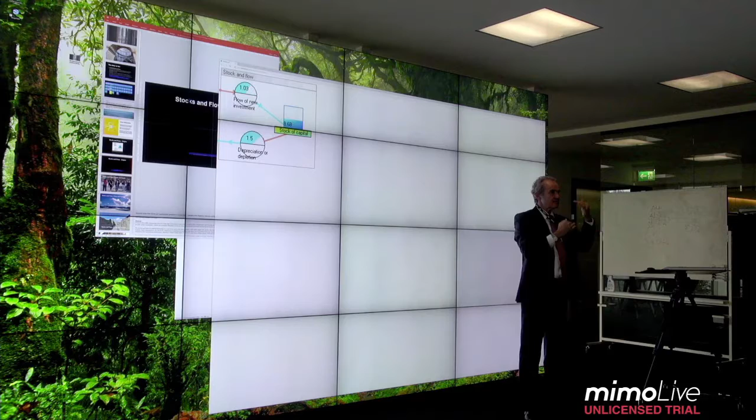If you now imagine this principle, see it just as a principle, not one-to-one in a city. This principle can be applied to many things. For example, here you could replace that stock and flow of money with another entity. What could be a typical entity for that in a city?

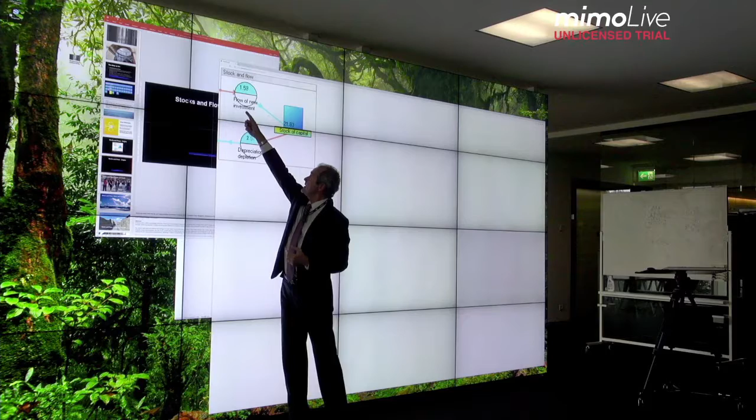Population. Sure, people. People are indeed the most important stock and flow of a city. I hate to use that word for people because it's really a terrible description of them. But if you abstract their stock and flow, how they behave in a city, it comes very close to that. People come in, moving from the outside into the city, and they go out of the city, or they die. That relates to the previous slide about the 2.5 to 2.6 billion people who will move into cities in the next 20 to 25 years.

Okay, now we go back to that one.

Right, so people, that's the most important stock and flow. And health is another one. As you know yourself, you have a certain stock, if you want, of health, but you can ruin your health really easily, and then you need a lot of time to build it up again. So you can also see your health as a certain stock and flow.

Then there are more, water, for example, and capital. Capital is the one that we saw at the beginning and where the whole principle comes from, but water is a very good stock and flow as well. Just think, at home, you open the tap, it's a flow, it's very obvious, but then you put some into a glass, it's a stock, you drink it, it's a flow again, and you can just see how it keeps working on and on and on.

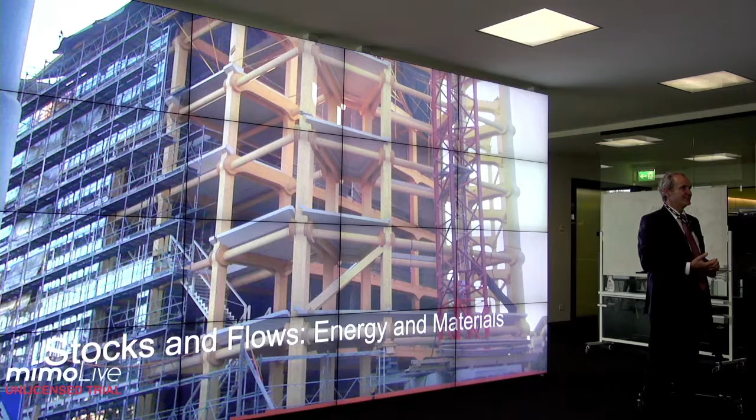Another example for that, energy and material. This building is now completed, of course. It's the Tamedia building here, but you see it was really done with wood and concrete. Our Japanese guest, you know the architect? Probably. Do you know the architect of the? Yeah.

Everybody knows that. And you could see it's a material that has grown somewhere else, cut down the trees, laminated, brought here to this place, become a stock for a while. But you could easily use this material later, just cut it into pieces and turn it into a flow again and produce energy with it.

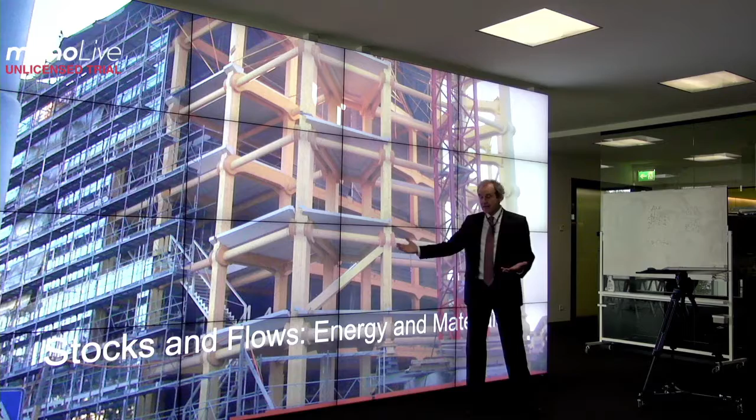As a matter of fact, in the village where I live at the moment, in Einsiedeln, recently, just last week, a new little firm was founded that has the purpose just to take the stock of old building materials, old wood that you cannot do anything with, take this stock, shred it, and make energy out of it. So you turn a stock into a flow, and you connect energy and material through that.

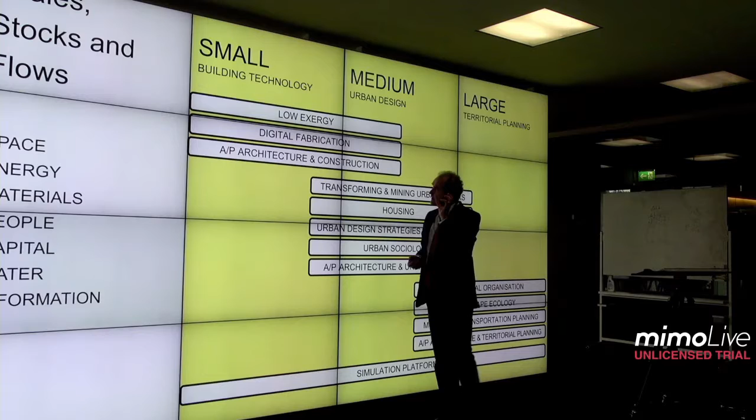Then the stocks and flows, you know them by now. It would be space, energy, materials, people, capital, water, information, health. You could just keep on going, but these are the ones that we try to study.

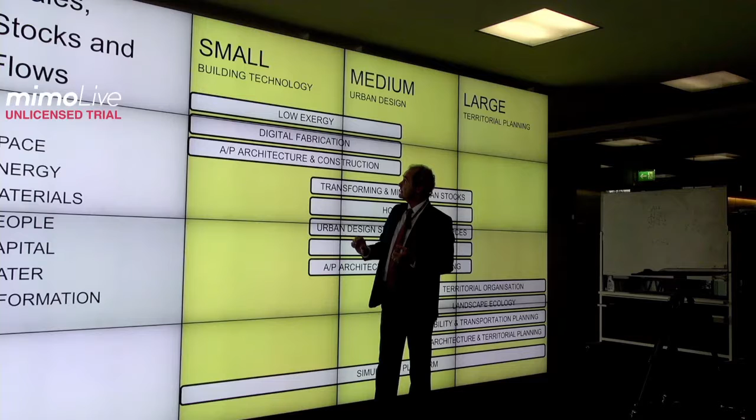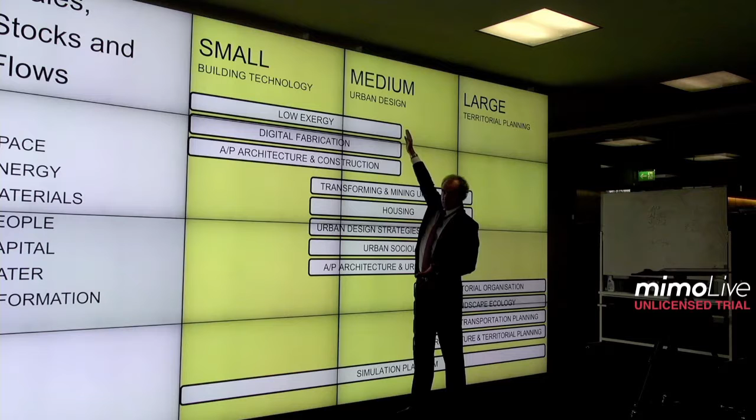And then we put them into projects, and these projects then explored, for example, the stocks and flows of energy on the small scale of a building, and you can see it reaches from the room all the way maybe to half a quarter of a city here. Or digital fabrication, or architecture and construction, all for stocks and flows.

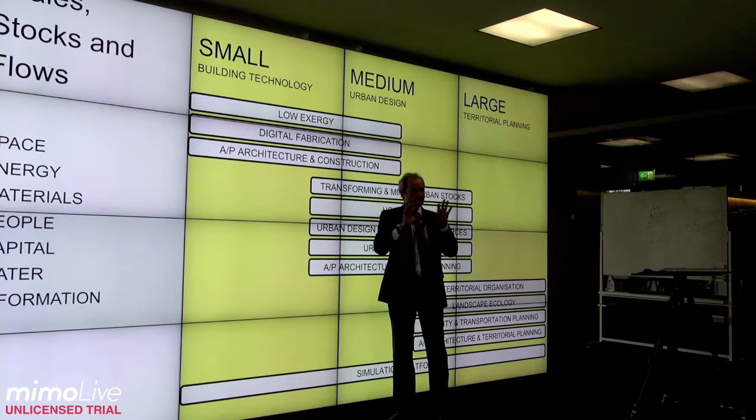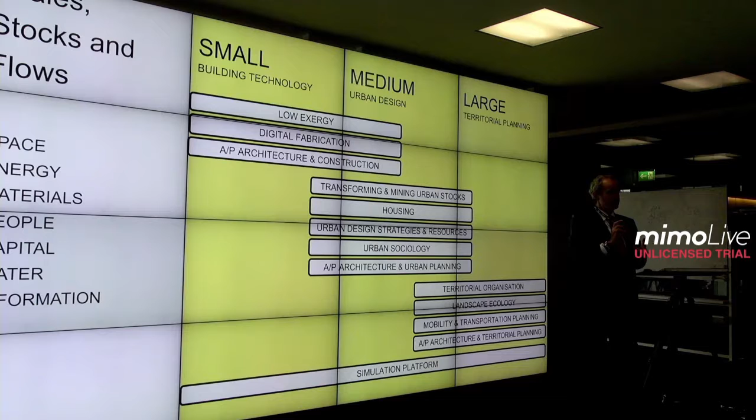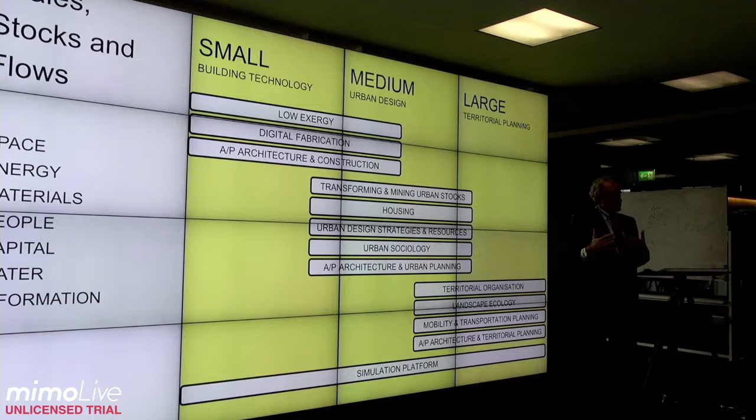Coming to the stocks and flows, but wouldn't a very central one also be life quality? Definitely, it's one of the main ones in the city. It is the main one, but it's hard to study it by itself. You can see the result of it. You can measure - people think you can measure the quality. They cannot agree on the criteria, but I think it is possible to measure quality.

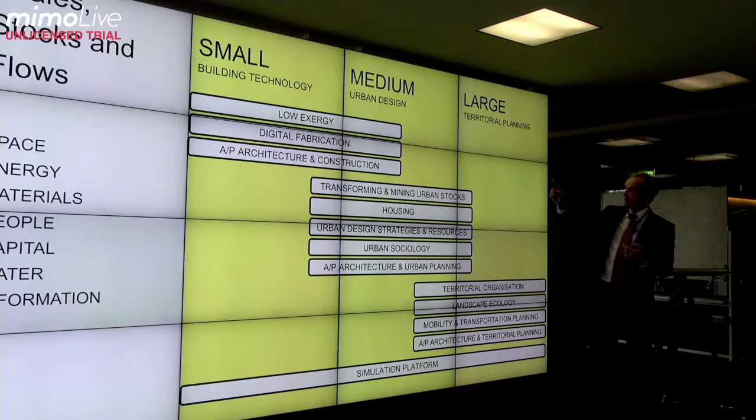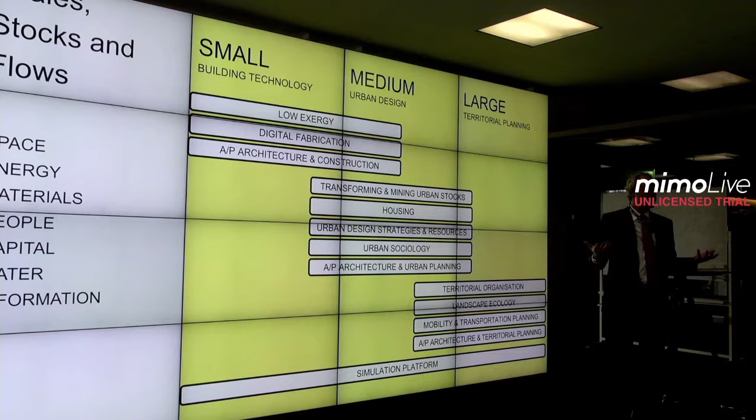But how to achieve quality? Either you look at what quality is and then analyze what stocks and flows the city has and try to invert it and make a better city or a good city this way, or you have to invent new criteria, as in architecture it's often done. But quality is definitely another stock and flow.

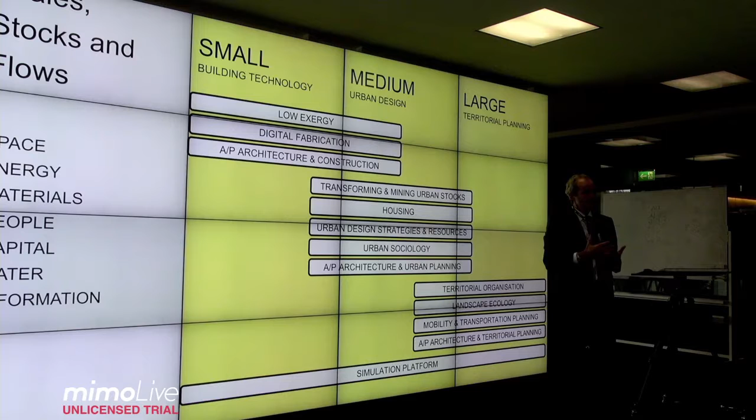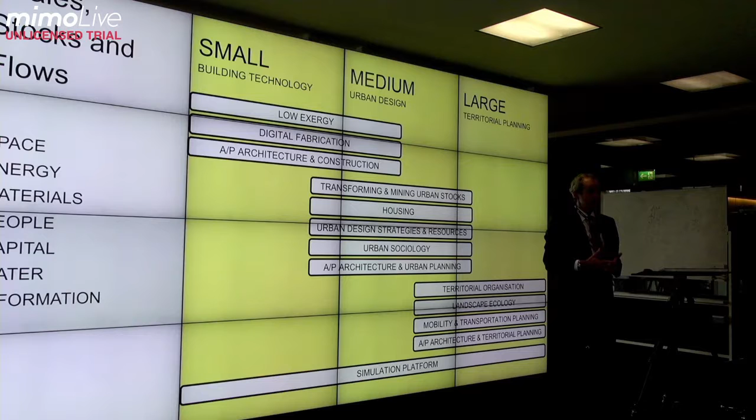It's actually a nice one because it changes over time, and it changes in intensity. Cities become very attractive or less attractive, and it's linked to all of them. Every one of them is linked to all of them.

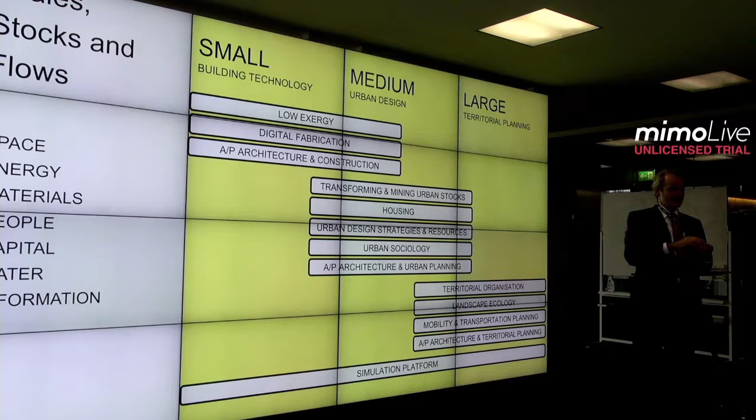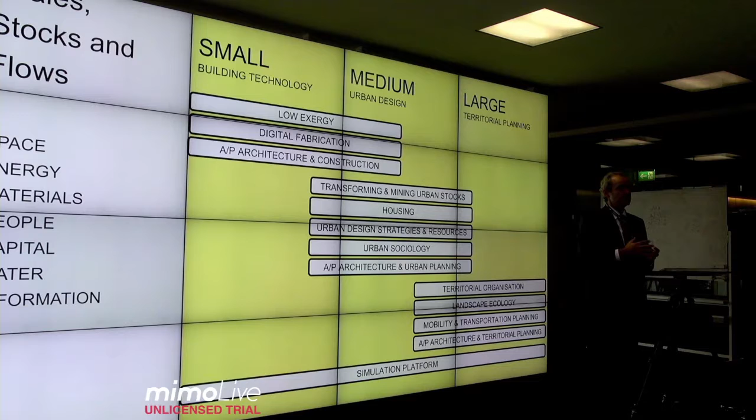And that's why towards the end of the semester we come to this view of a city as a complex system, the complexity science, where you can express somehow this total connection between elements without having simplistic causal relations between them. Quality and health is another one, that's also related to all of them, but it's hard to say - design a healthy city, it will be different in every place, in every time.

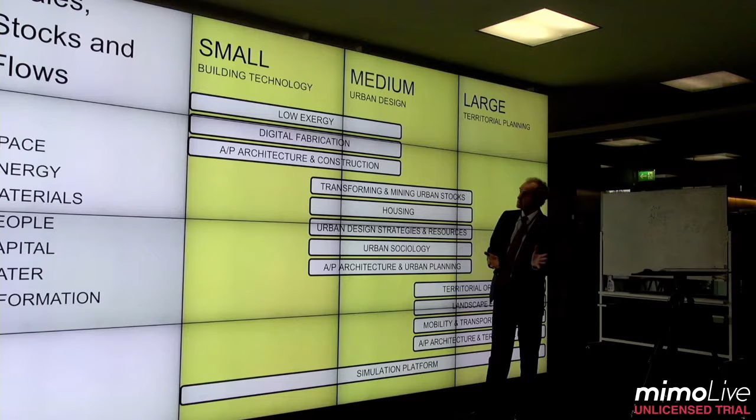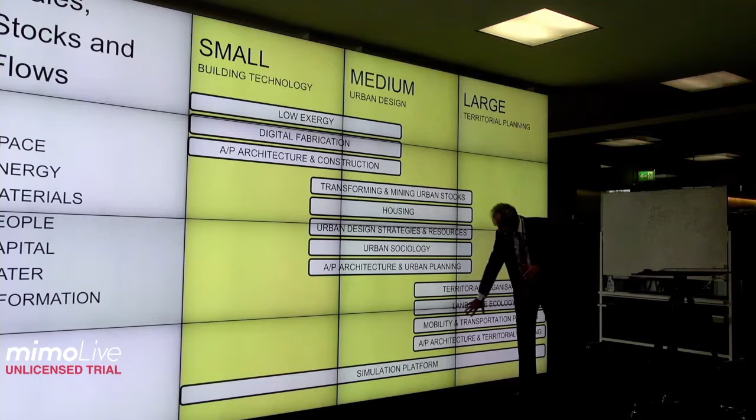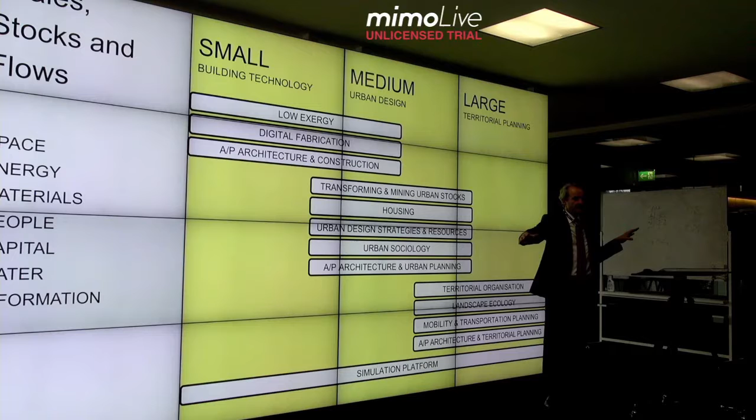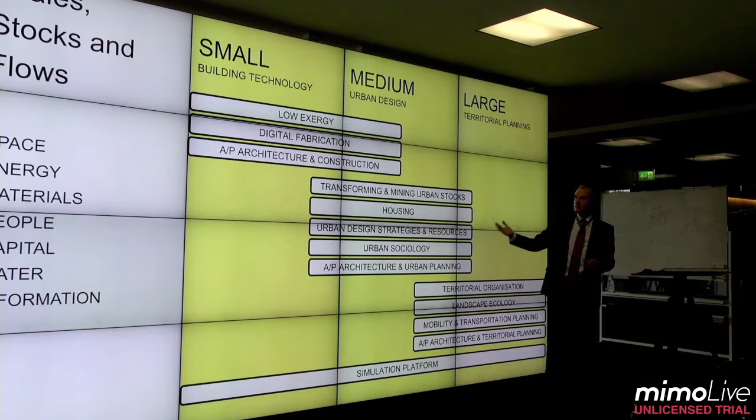But what we could find out was that some scales or some stocks and flows are applicable to certain scales, like those ones to the smaller scale, those ones to the medium scale, and then some of them to the large scale. Our contribution to this whole exercise was that we built a simulation platform covering all the data coming from these different research projects, taking in all the data, then visualizing the data and making it available to each one of the other projects.

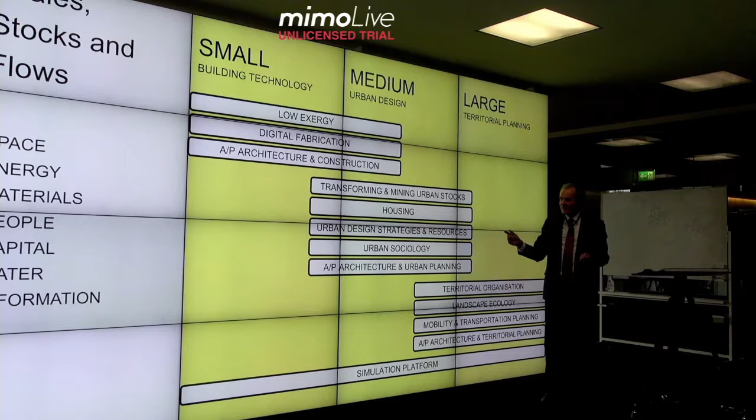Let's go quickly through a few applications of these stocks and flows to get an idea - they are all very important for the smart city or the responsive city. We know that now. At this point when we did that, smart city, responsive city wasn't even existing. But now that we have done this research work, we know what we need to make smart cities and responsive cities.

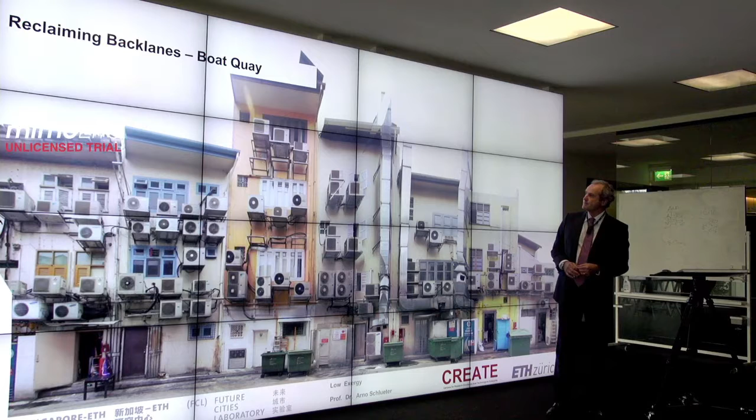These are all air conditioning units on the outside, from the low exergy project in Singapore. The low exergy project deals with stock and flow of energy, mainly on the building scale and city quarter scale. Electricity comes in and turns into hot air coming out, leading to problems that make these places unlivable. If you have to live right next to those, or in a back alley next to them, the quality goes below zero.

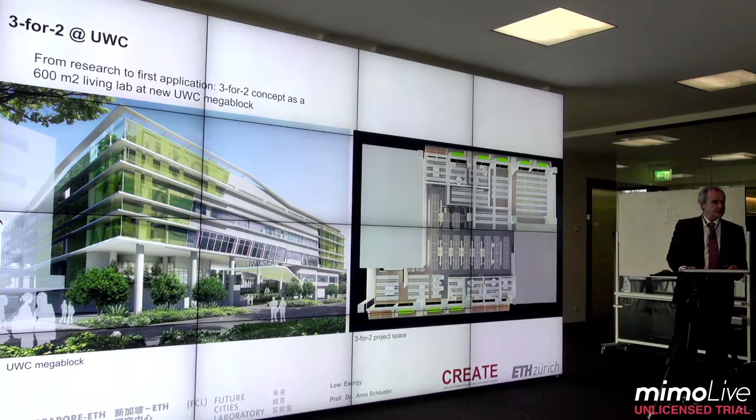They took this principle and turned it around because they saw this is reality now, and thought of the future—think of Mark's lecture on the now city and the future city. They took this step physically. They saw the now city: this is how it is now. It's unbearable, hot, it stinks, it's loud. What can you do with that? They turned it around and said we have to change the way we air condition buildings.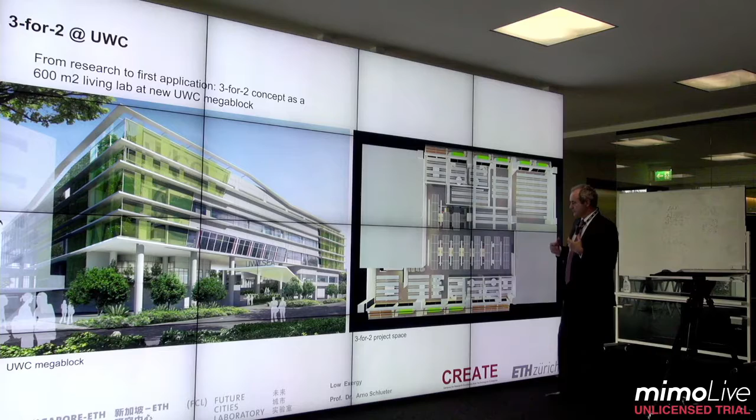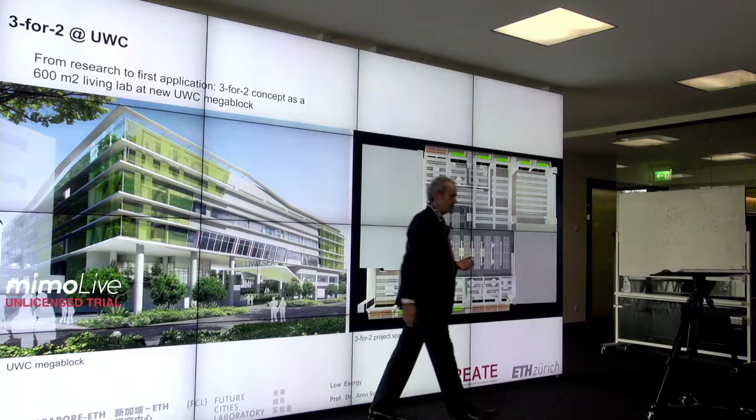They designed and built an alternative way of air conditioning for this actual building, in two floors at the United World College of Southeast Asia in Singapore. So that is stocks and flows of energy.

These two young gentlemen you know very well—if you've been to the new robotics building here on campus, you've seen it, you were at the opening. That was 5-6 years ago. That's how they started this application, how to use robots in a space to construct buildings. This was their start at this time.

You see the robots are much smaller, but the ideas were already there. So this is the stock and flow of material—how you can handle it and combine it with information embedded in the robotic infrastructure.

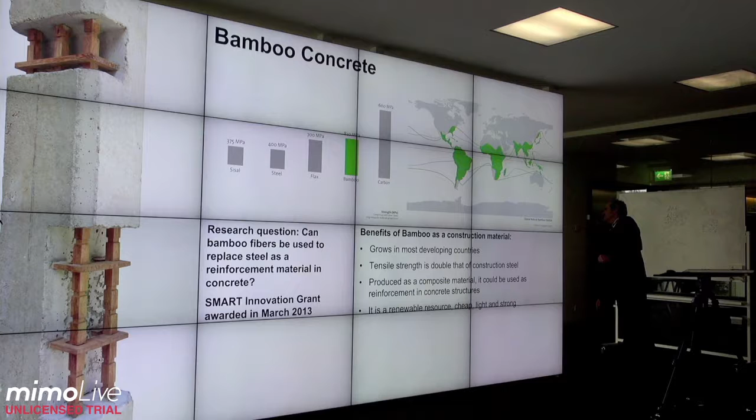Then the stock and flow of material also—another wonderful example. Estefania, could you steal a material sample from there? Anyone? Look there on the table. Maybe there's one—no, on the back, the physical material. That's too heavy. No, this piece. Yeah, this. Oh, it's screwed to it. Okay, you have to go there later.

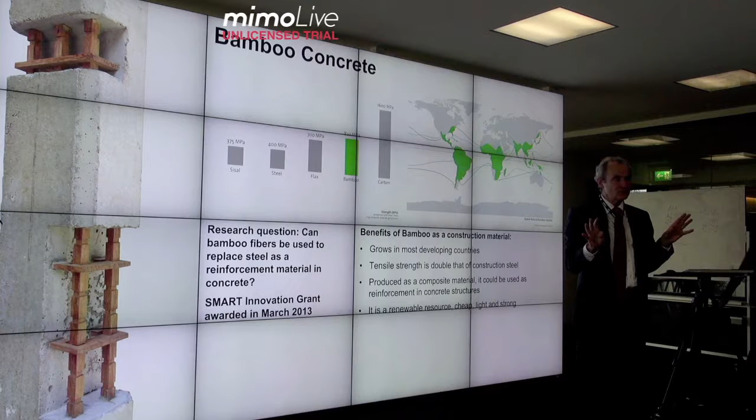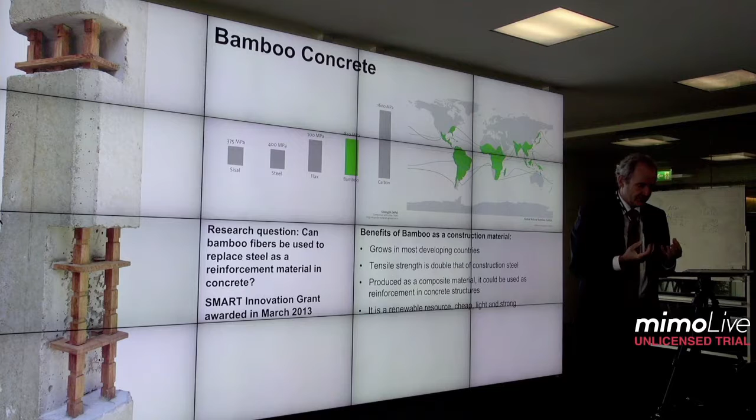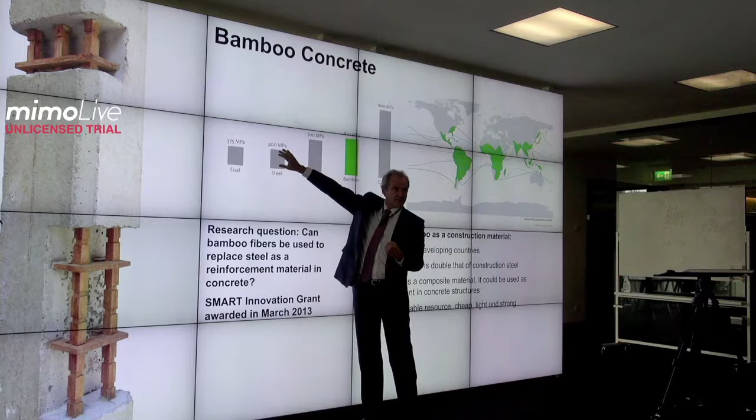But the point, you know it, right? This is bamboo material—not pure bamboo, it's laminated bamboo. Bamboo is split, cooked so the sugar goes out, then combined under high pressure with a conglomerate, a plastic basically. That makes a material that looks like this, which is very hard, very dense, and has an incredible tensile strength, higher than steel. This would be the tensile strength of steel, and this composite material with bamboo is higher than steel.

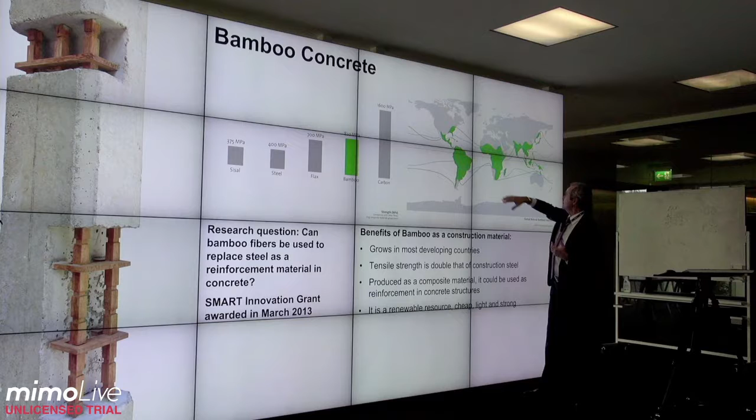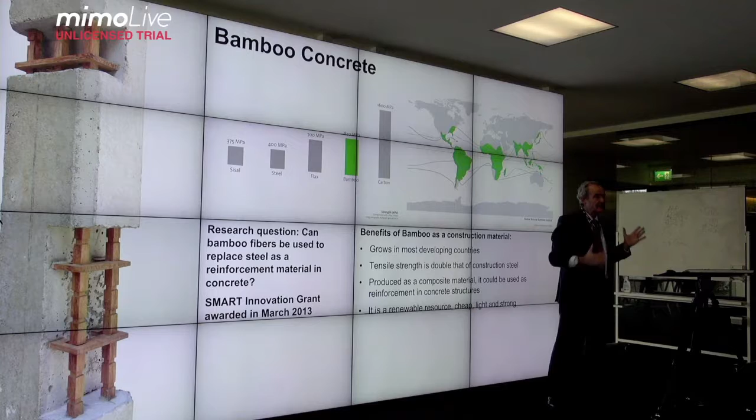It's quite amazing. And this is again the stock and flow of materials, because here in green you see all the places where bamboo is growing naturally, and you also see all the places where normally not much steel is produced, like all of Africa—steel has to be imported there, but bamboo is there. So the stock and flow of building material could be changed completely by using a different material, replacing steel with this bamboo composite, for example.

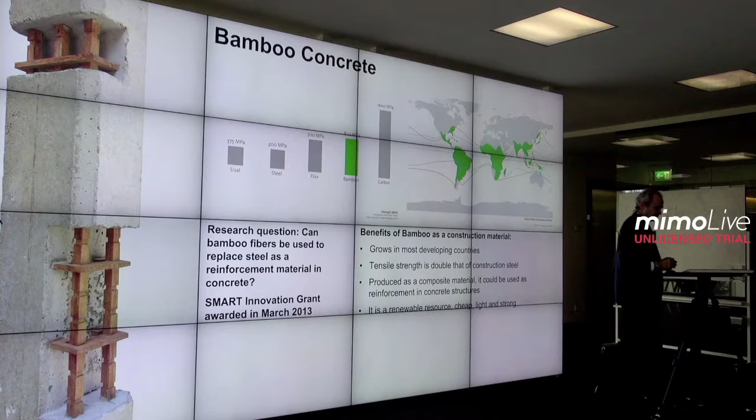And then this one is quite stunning also, the transforming and mining of urban stocks. Urban stocks—all of these are urban stocks, they're all materials. This building also has stocks: it has concrete, less hard materials, glass, steel, natural stone. And you can mine this stock. In the old days, one would have just thrown it away, trashed it. But now, every one of these materials is valuable.

Our colleague Dirk Hebel is working on a big book on identifying each material in a building, its value, and making it part of the urban stock. Because if you know that stock, it's like money—you can sell it, buy it, and reuse it.

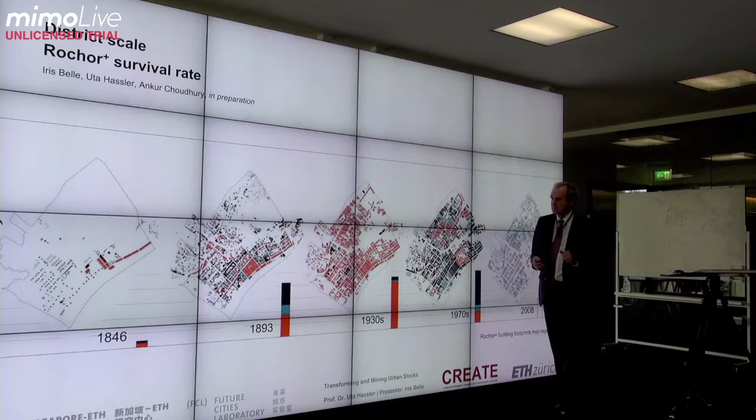Uta Hassler, who retired just a couple of years ago, was working on this very carefully and made, with her groups, some incredible visualizations. This is a part of Singapore, of the city of Singapore. It's always the same part.

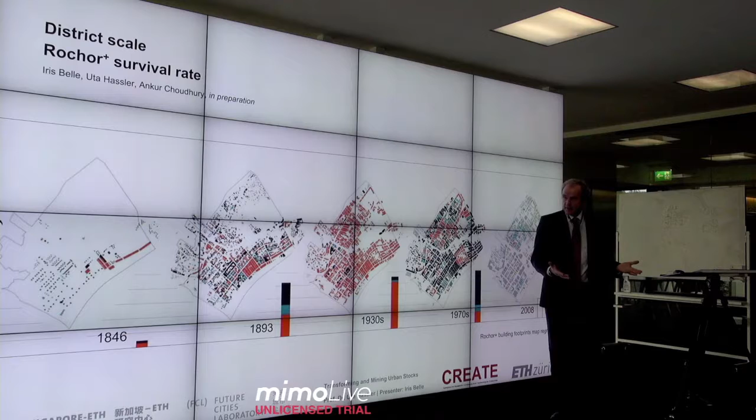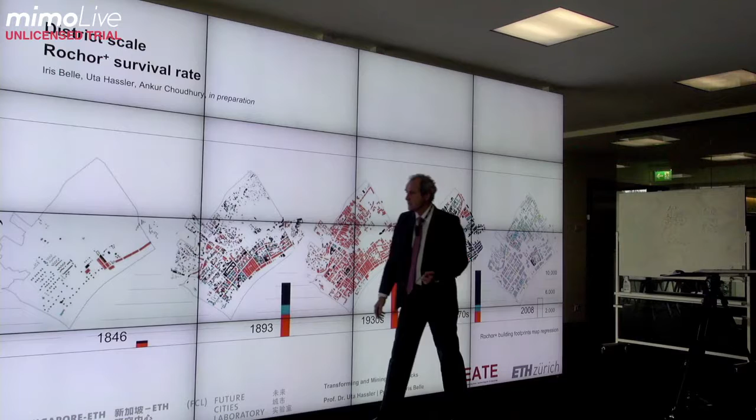You can see 1846, 1893, 1930s, 1970s, and 2008. How would you think something like a city, built as a stock of buildings of bricks and steel and everything, should be stable, right? But it's not—even there you can see how density increases. You always see the new stock and the stock that was torn down. In the 1930s it was densely built up; you can see all this red area is built up.

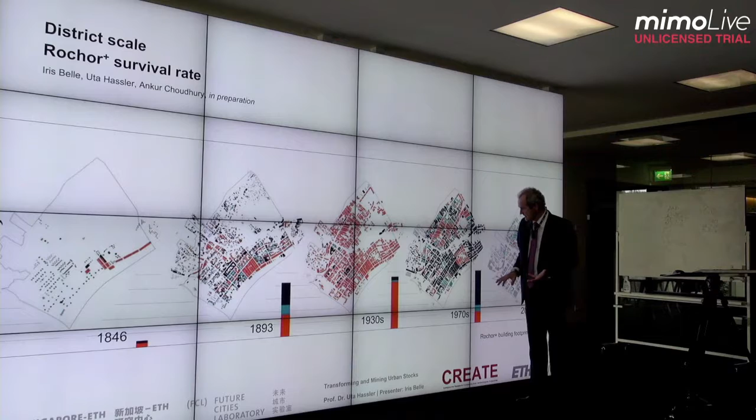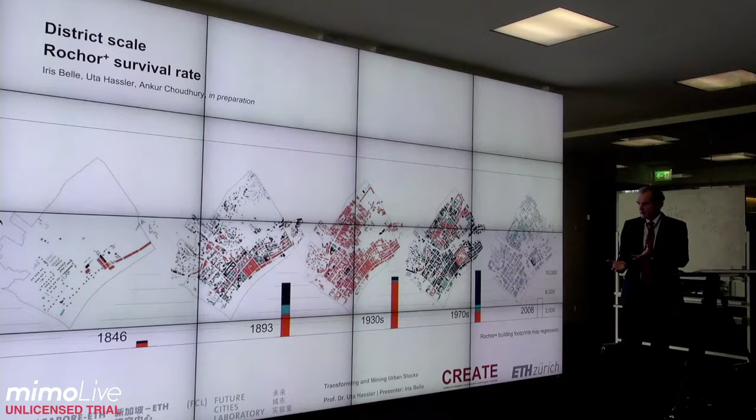But then suddenly in the 1970s, many of those buildings just disappeared. They were torn down and used for landfill, or land reclamation as it's called there. So the stock became a flow—whole buildings just vanished and moved away into the water or to another place. And it keeps going on, a constant transformation of the city.

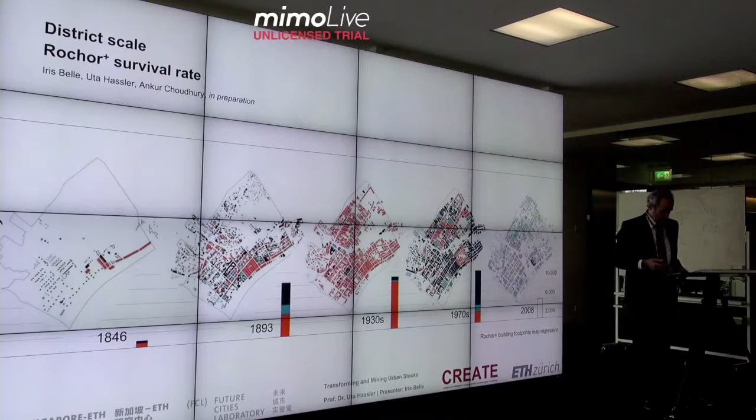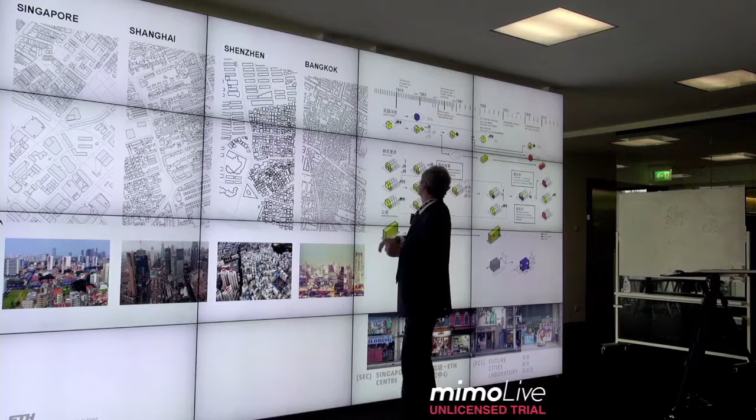That can also be observed—Kees Christiaanse is doing research on the stocks and flows of density. If you compare big cities like Singapore, Shanghai, Shenzhen, Bangkok, you can see how the stock compares. In Shenzhen, this is the old part, where everything was extruded—buildings extruded by 10, 20, 30 stories—and then whole parts were razed for new buildings. That compares differently to places like Shanghai or Singapore, so you get a very distinct profile of each city.

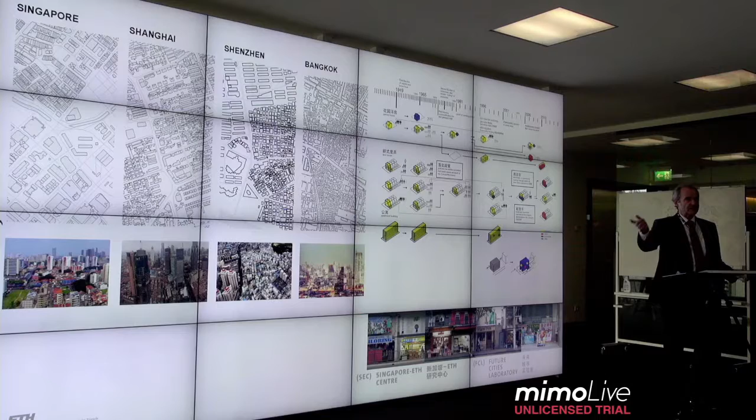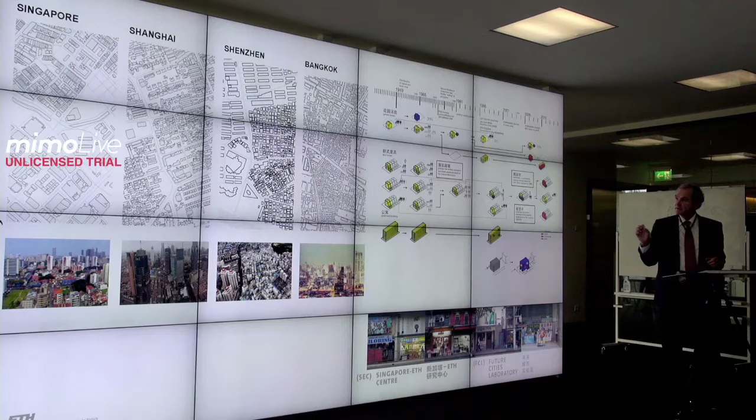If you remember last week, Mark showed the communication patterns of cities, which is also like a frozen flow of information in time that he could visualize. Here you can really identify and compare cities in the same way, because that's a flow of information—of building footprint information over time.

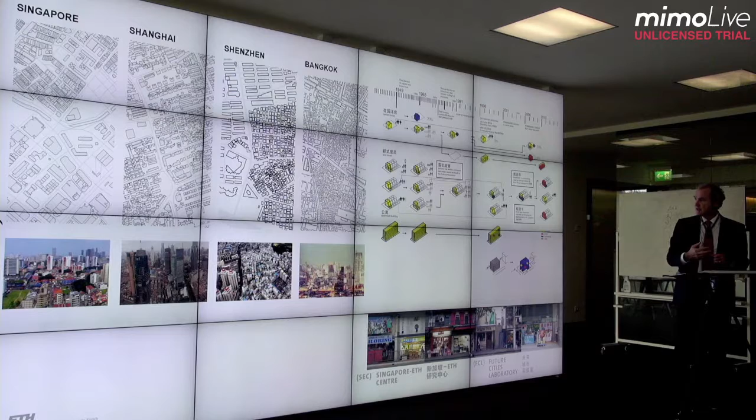The same thing happens in South America—Marc Angelil did research on that. And the other stock and flow that's incredibly important is water. Christophe Girot has worked on this.

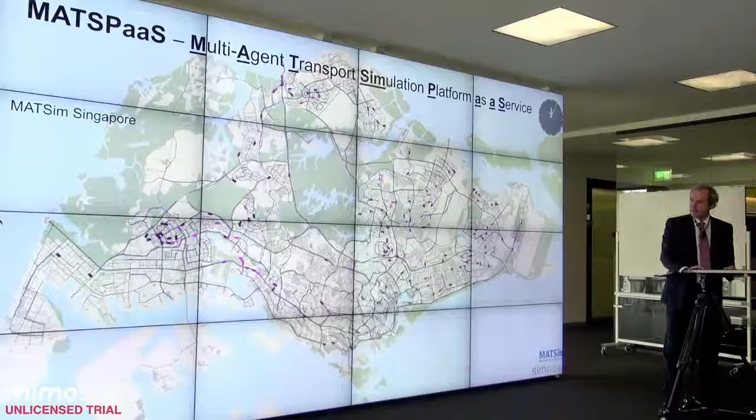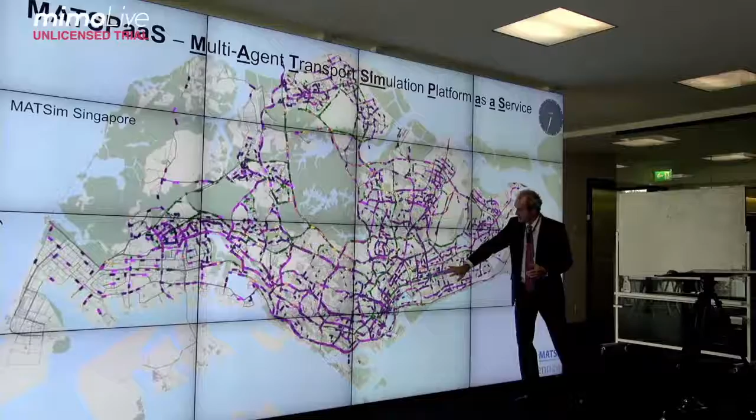Kai Axhausen and his group did these wonderful simulations. You can see the time running here in the morning. Now it's 6 o'clock, the traffic is getting really dense, and you can see how it slows down. You have some green parts where it's still moving, other parts where it's really getting stuck. You see this part here, this is the industrial part, relatively low density, but you have other parts like here, the downtown area, where you have very, very high density.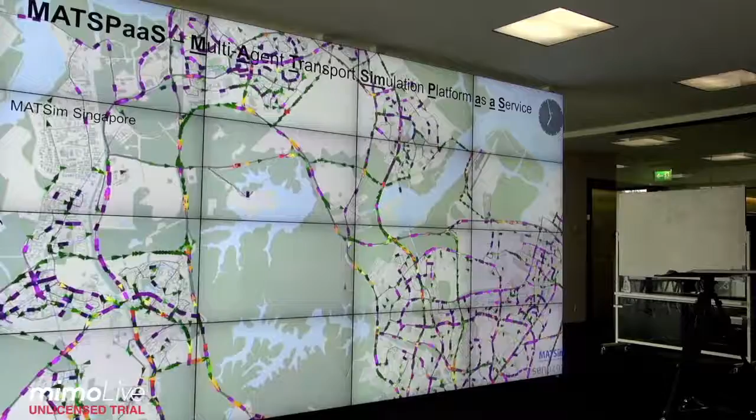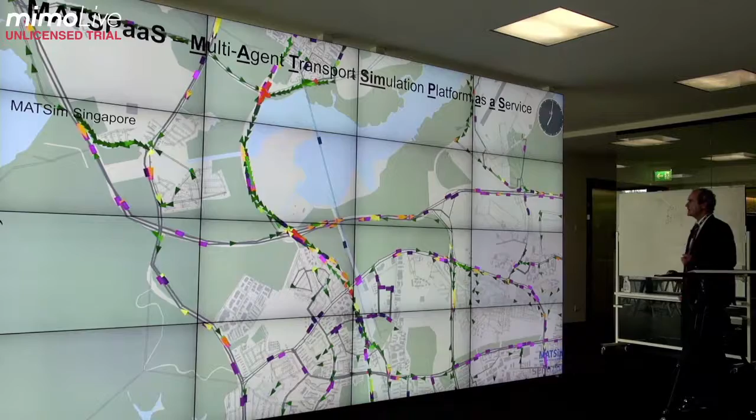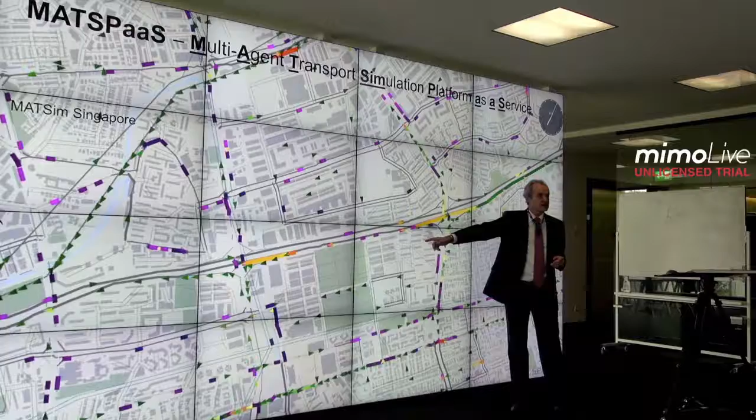This is happening in every city today. And here comes the big challenge for the future, because people simulate and calculate that out of these 800,000 cars, maybe you would need only 200,000 or only 100,000 to get everybody the same transportation that they need.

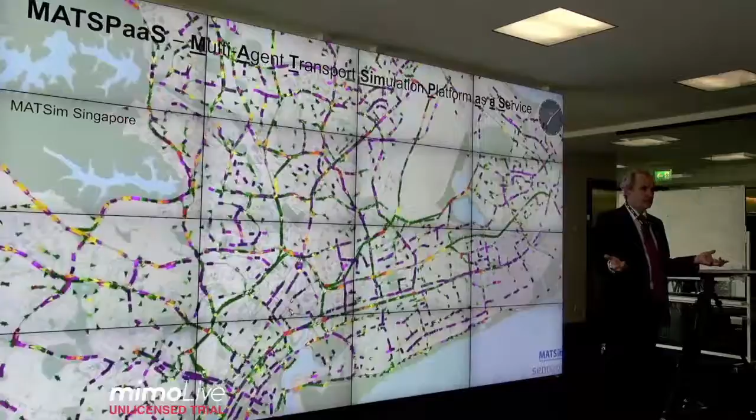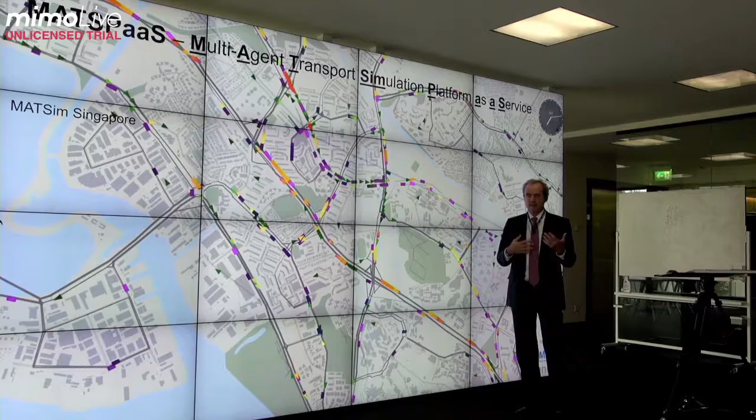Everyone who owns a car says, never, I want to have my car. But others say, yeah, it makes sense. We can share them, we can have autonomous cars, we can do all kinds of things, and that would reduce the number of necessary cars, and it would reduce all kinds of pollution, noise, and other things.

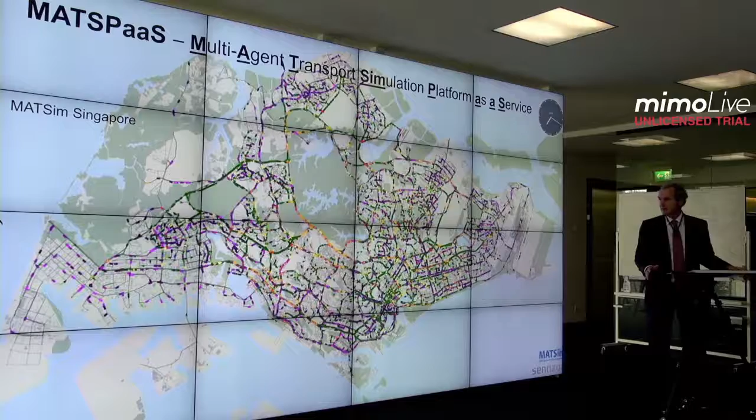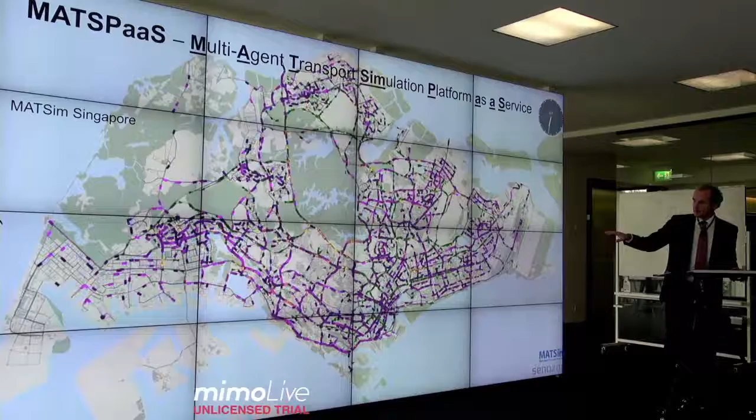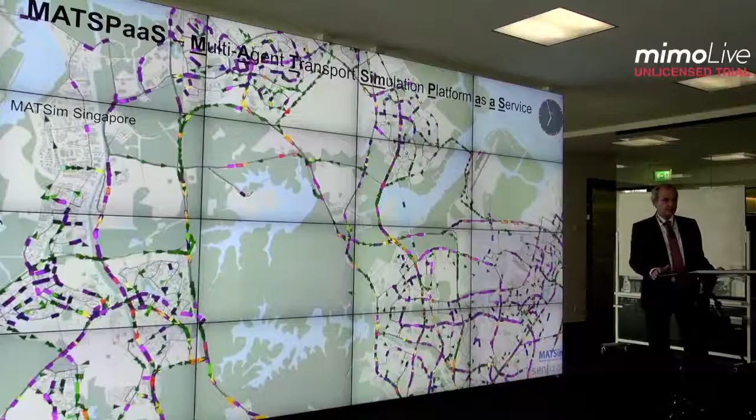Simulation is an important field with data, artificial population simulation with data on a city to simulate scenarios for the future. This is a very good example for a smart city, because with these simulations you can show how the city could be in the future, and you could make it as good as possible. Coming back to the quality aspect, if you see fewer cars as a quality, you can use this to show how it would be possible to arrive at this situation.

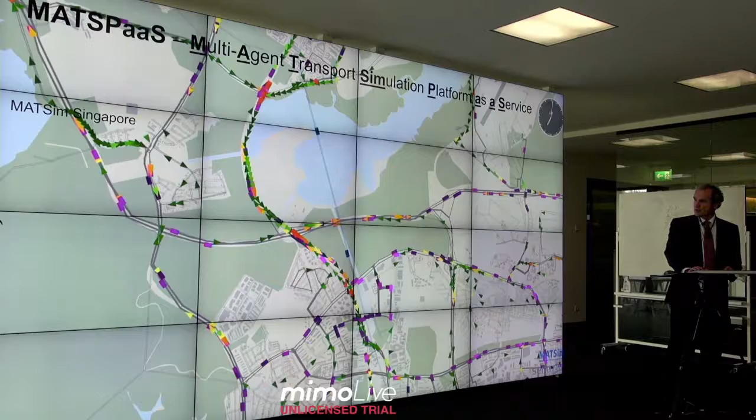Okay, so this is MATSim, the name of the program, and that has been used in many places now.

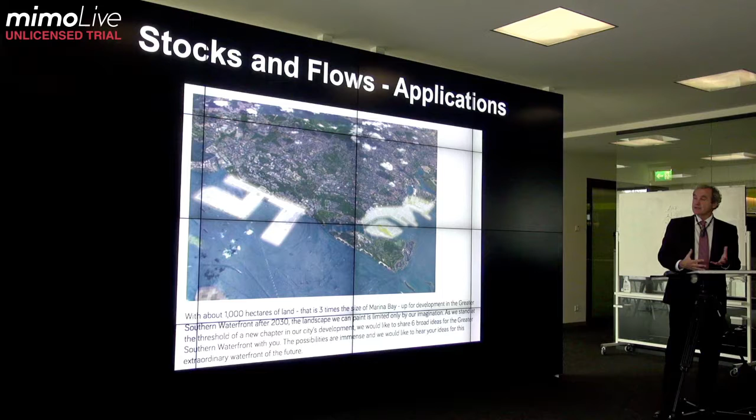Now, stocks and flows coming into reality. This was all practice, this was all theory, but now it's really real, and that just came up this morning. I sent this around to some people here. This is the same city, Singapore, and we are getting involved now in the design or redesign of this part of the city. Singapore in itself is already there, but this part is now part of the harbor. There are hundreds of thousands of containers sitting here. All of those will be moved back, and this will become part of the city, a new city.

So we can apply all these stocks and flows ideas that we had. And literally you can go through them. The people, where will they move? Where will they want to move? The material, what is this built on? Because it's all water now. Where does the water come from that they need? Where does the electricity come from, the energy? How is the stock and flow of the temperature? How is it impacting the heat island effect, and so on? All of these things can be asked now in practice on this very site.

It's called Tanjong Pagar, and some of you in the future might be interested to work on this project as well. It will be starting soon. Together with the group from Kees Christiaanse and also Vittorio Lampugnani, we will try to use this idea of stocks and flows to make the best possible new city here in Singapore.